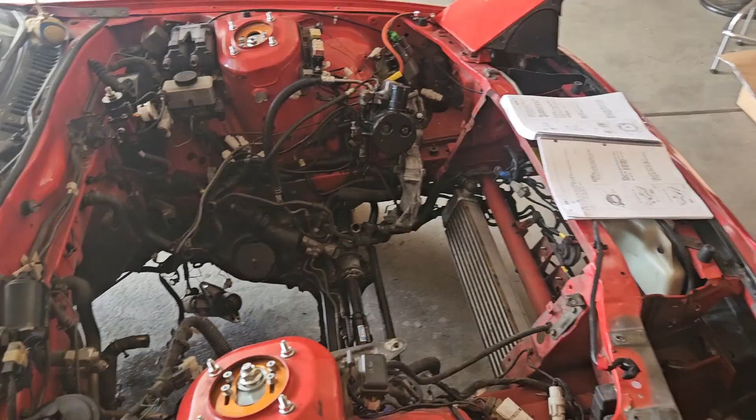Today is the day we start rebuilding the engine. So we got all the parts, we got everything ready. Everything's ready for it to go into the engine bay there. So yeah, I'm going to be building it today.

The first step is to get all the rotors ready to go. I already got them all cleaned, as you probably saw, but installing all the springs and the corner seals. And then we need to take the side seals, since they're too long, they come that way. We have to sand the ends of these down to get the right clearance between the corner seals and the side seals. So we'll be doing that, and then we'll get it all together.

So for the rotors, the first step is going to be getting the side seals all trimmed down, since they come longer than they should. So you kind of have to just sand the end of them down to make them have the right tolerance between the corner seals. But the first thing you want to do, so you can check that tolerance, is have the corner seals in. So we'll start off by just getting all the springs in and getting the corner seals in.

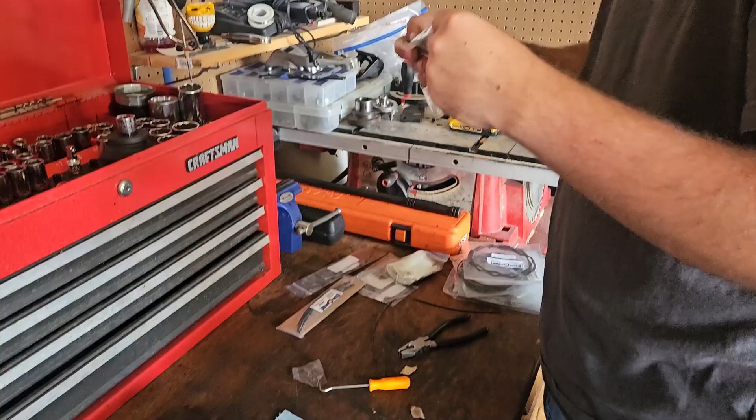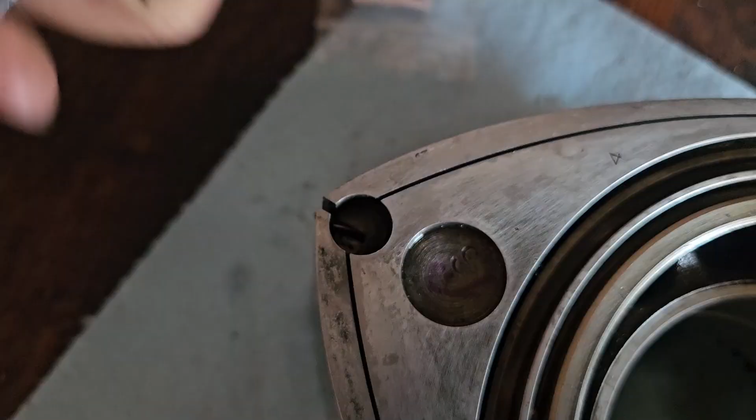They're very tiny. And make sure the gap on the spring is lined up with the gap for the apex seal, like that. Oh, this one went vertical through the hole. Let's see, how many times can I fail to put this in? There we go. Close enough.

And then you can take your corner seals here, which are individually packaged, which is pretty nice. Love Mazda. Get the corner seal out. These, like I mentioned, are the factory Mazda brand OEM ones. So should just be able to take these and slide them in there.

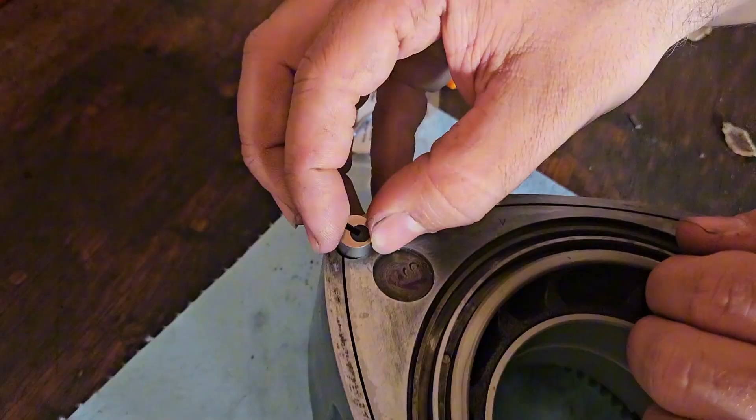You don't want to line up the apex seal hole at first. You want to put it to the side, because you're going to have to take it out, and you do that by coming up from underneath. But you just put these in to make sure that they line up and everything's good, and they should be kind of springy in there. And then you get the rest of them done.

Alright, so we got the corner seals in. You also just want to put these in to make sure they fit good and they don't bind on anything. With the springs, they should be springy. So these are all perfect in there. And this is the brand new side seal. You'll notice you push it up against this end. On this other end right here, it is too long to fit in. You can see that gap there. So that is what we want to get down. We want to shave that down.

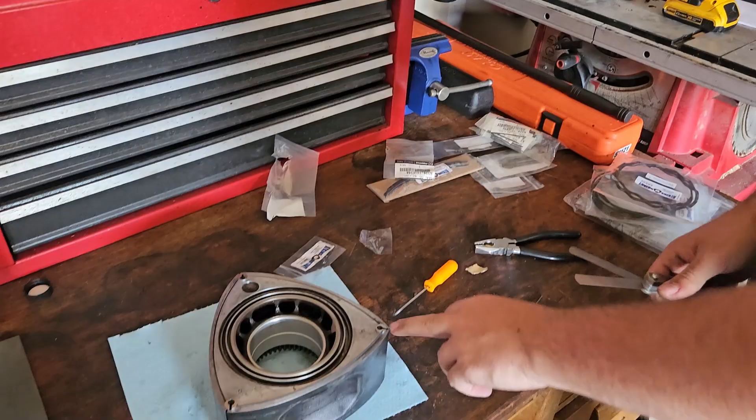The spec between the corner seal and the side seal is between 0.05 and 0.15 millimeters. So we got some feeler gauges here. It's pretty thin, but we'll measure that. And to grind that down, we have some sandpaper here. This is, I think, 220 grit, and then this is like 800. And I put some oil on that just to keep it lubed up.

But you want to go at a 45-degree angle and just keep doing this, and it'll sand it down. And you'll do this for a while, and then you'll check. And then the 800 grit sandpaper we have, that's just to kind of deburr it, make sure everything's smooth on the end. So we did that for a little bit.

And you can kind of tell that barely did anything. So you kind of have to do that a whole ton. But then after a while, you'll be able to put it in and it'll actually fit. And then you check the clearance and you should be good. Then you want to do that with all of them on every side of each rotor. So that's 12 side seals total you have to do that with. You only have to worry about one side of the seal. The other one you can just press up against the other corner seal, if that makes sense.

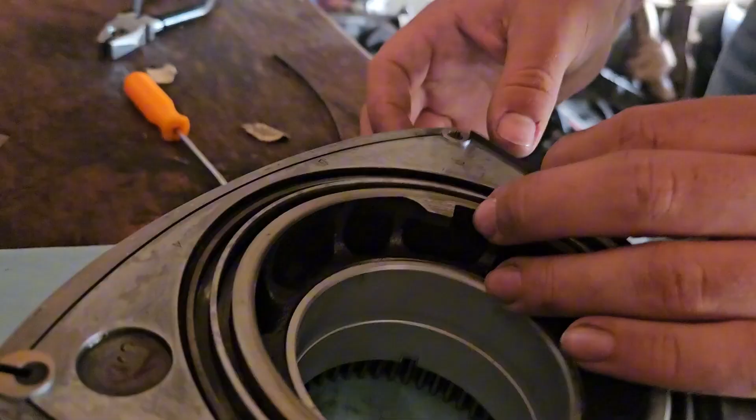Say hi to YouTube. What's up? Hi YouTube.

So, while we are working on getting this one down, you want to make sure you use the same ones. This one I'm measuring on this side, so it's going to stay on this side. And then my friend here is going to help me out. He's going to do this side.

One thing you want to keep in mind, I forgot to mention, one of these sides of the side seal already has an angle at it. And that is so it fits right against the corner seal there. The other side, it won't really focus, there we go, it is flat. So that's the side you want to grind down, the flat side.

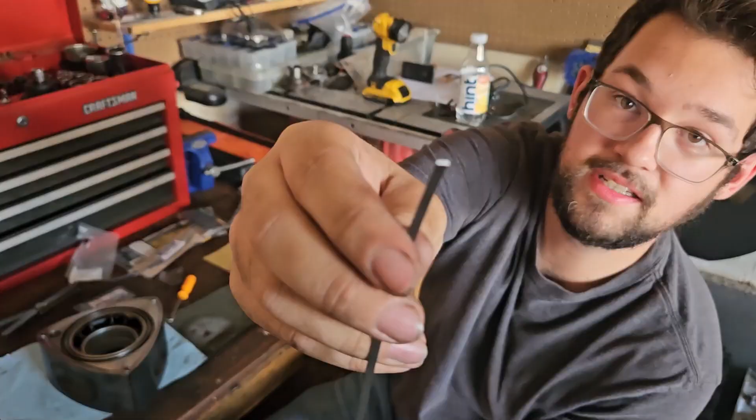Awesome. So we sanded this one down. You can see that is the edge we've been sanding. You want to match the angle of the other side pretty much. It's hard to see on camera. Not gonna focus. Yeah, that's okay. But you can see when we put it in here, it lines up. Oops, hard to do. Lines up real nice against the other one. Slides up and down pretty freely.

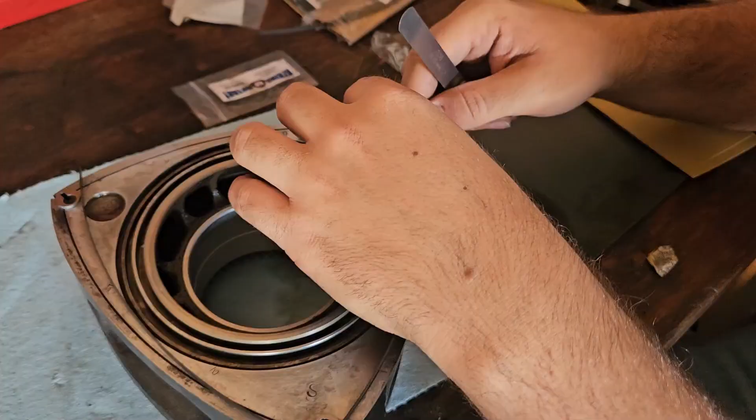And then we have our feeler gauges here, and this one slides back and forth with pretty minimal effort against the side there. And then this upper limit doesn't fit in, which is pretty much what you want.

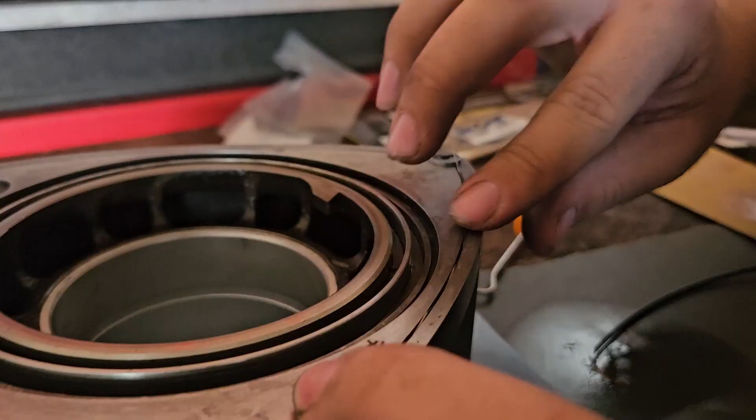So now that we have this one done, I'm going to take the spring here. You want the winged ends of it going up to get even pressure against the edges of it. And then you just slide them right in here. Just like that. And then you can put your seal in. Try to get it more centered. The spring, there we go.

So then with the seal in, see that's all in there. It's nice and springy, which is what you want. When we go to install everything, we're going to coat all this in Vaseline, just to hold it together while we install it. But in the meantime, we're going to go ahead and get all the other seals done for that. And then we're going to do the same for the other side.

So we got all of these side seals nice and clearanced correctly. You can see they're all pretty springy. So what we're going to do before we flip it over and work on the other side is we're going to work on the oil control rings. There is an inner one here and then an outer one there. Each of them has a spring and then a metal ring with an O-ring inside of it.

These are the O-rings here. These are the metal rings. These O-rings go inside these guys, which is a two-handed job. So I'm going to get these set up with the correct O-rings, and then I'll show you guys how to put the springs in. Alright, so I got the O-rings in here.

There's a bigger O-ring and a smaller O-ring. This is the outer control ring and the inner one. It goes inside this outer one, which is kind of weird. It's kind of difficult to do since it folds over on itself, but that'll be fine. Should be good in there. And then the small one's easier. It just goes along the outside, so you just stretch that over.

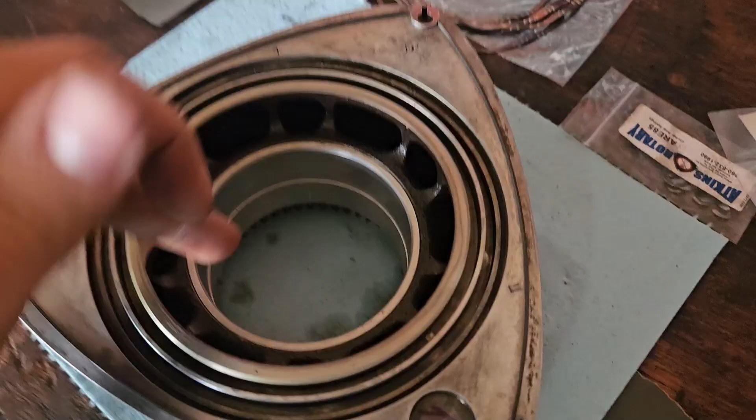And then this is where it gets a little confusing with these. I'm working on the rear rotor here, and you can see the interface for the gear. That is on the stationary gear, goes on the rear plate. There's a stationary gear on the front plate and one on the rear plate. So these rotors are pretty much facing in opposite directions. You can think of this gear ring being out.

I say that because the oil control ring springs depend on the direction it's rotating in. So it's divided into front side of the rotor springs and rear side of the rotor springs. The front side has these white marks on it, and the rear side has blue marks on it. You can see it all explained here in the list. That's the front. It says cream paint. That's white paint. Or blue paint for the rear face of the rotor.

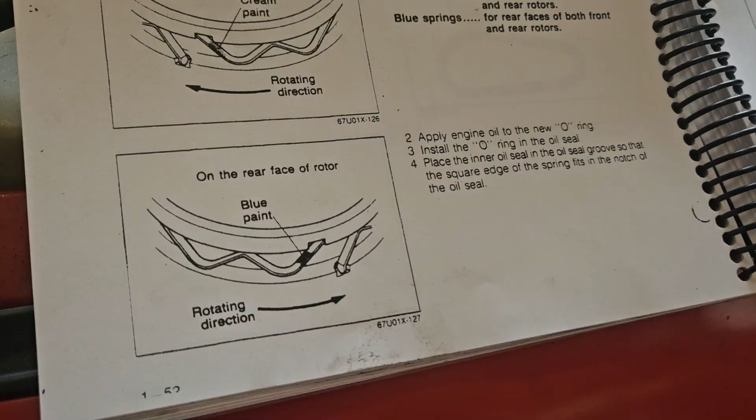You can see the rotating direction differences, and you can see it has a little hook that hooks into the rotor, and you can see the holes for those. Let's see if I can get them to focus. Like right there, there's two on each ring, and each ring's offset by like 90 degrees. But those are where the edges of these springs slide into.

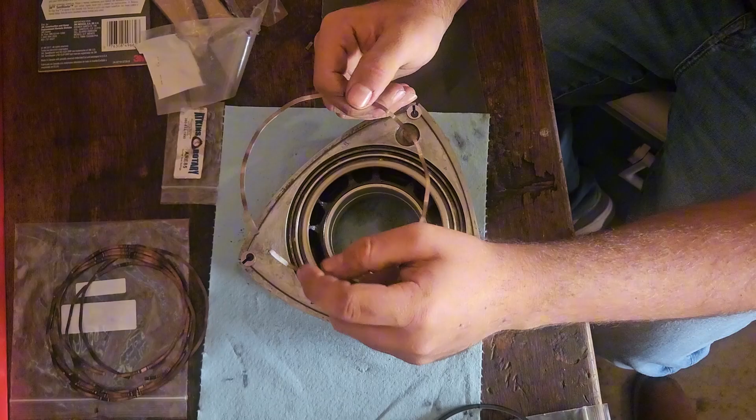So I have the white painted ring springs here for the front face of the rotor, like I was talking about. And what you want to do is you have the painted side up, pointing out, and then you can see in there are these little holes. You can see there's two on each of the outer ring and then two on the inner ring.

With that paint up, you take this little tab here with the curved end and you slide that right into that little divot there. It's kind of difficult, but don't worry if you get it wrong, because it'll spin around correctly. But you can see here the rotor is spinning this way, so it's dragging the oil rings back that way, and the pressure on the spring kind of locks in place there.

Then you do the same thing for the inner one. White paint out, take that end piece there and slide it right into the groove, and then I want to get it set in there. A little difficult, but it's hard to do, huh?

But now that that one's in the groove there, the inside ring is all set to go. Alright, once you got the springs in there, these are the control rings. Got the O-rings up in there. On the bottom side, you can see there's these little indents here, one on each side. That's how you can tell that's the bottom, that goes down. These little indents catch on the upper edge of those springs that we put in.

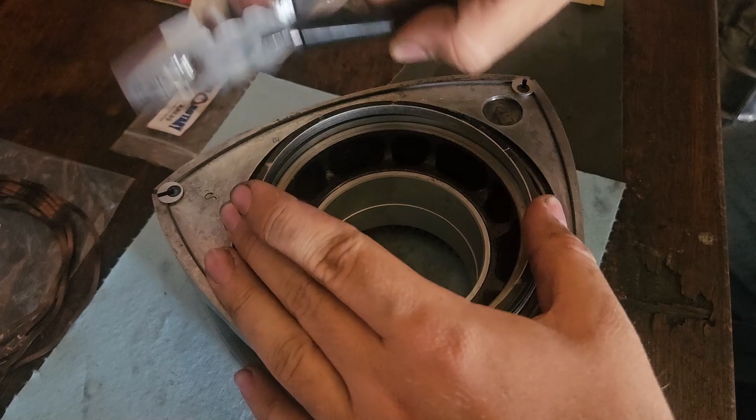You'll notice it's sitting a little above the edge. That's what you want. This is another sealing surface like these, but instead of sealing air, it's sealing oil. While it's in there, you can feel it, but it might be hard to see, it has some springiness to it. And that is what you want. So it sits a little above all around, and it springs.

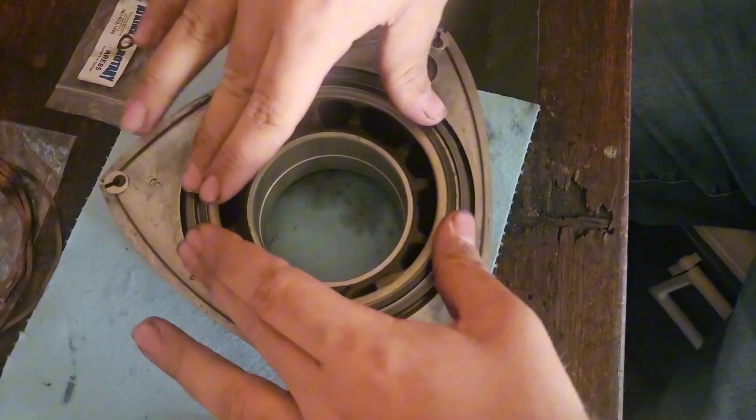And then you do the same thing with the outside ring. Get it lined up with that tab right there. Drop it in. Take the old ring, if you have one, and then just use that to help you get it seated.

Easier to find a mallet than this wrench. Is it working too? No, it's not over here. Yeah, they're using it on the brakes.

But just go around, tap it there. Broke the control ring. This is why a mallet's better. Yep. So I'm not too worried about it. Nothing lost, really. I guess that's why you want to use an old one instead of a pressing tool, instead of pressing damaged ones. But let's see.

You can stop doing that. Are you doing it? No, please, thank you. My car's out there. So, maybe easier.

Well, just tap it in like that. And that should be. Oh, I broke it again on the other side. Make sure you get the pieces out of there if that happens. But this should be good for that one. See, it springs just the same. Should be good. Might have to hammer this side down a little bit, but yeah, it's good, springy like that.

Right there. And then once you get that done, you do the same thing on the faces of all the other rotors. Of course, on the rear side of the rotors, you use the blue painted springs, but everything else is exactly the same. Perfect.

So with one side of this rotor done, since we're going to be flipping it over and moving the rotors around and later installing them, we want to make sure that all these pieces we just put in stay in place. So once we verify all the clearances and that the side seals and corner seals are all good, make sure you keep track of what goes where, right? So make sure you leave each one next to the hole you took it out of.

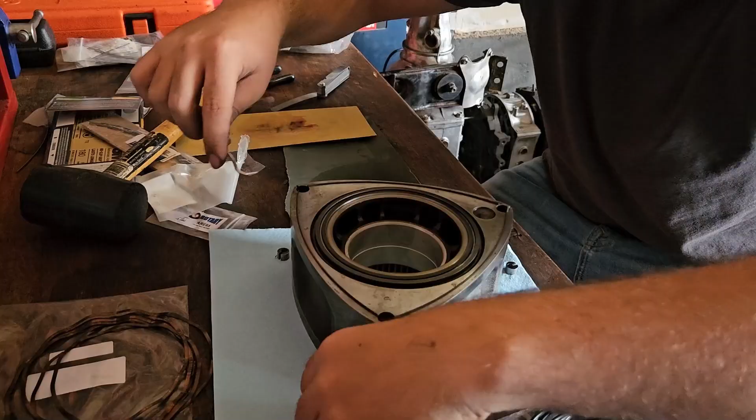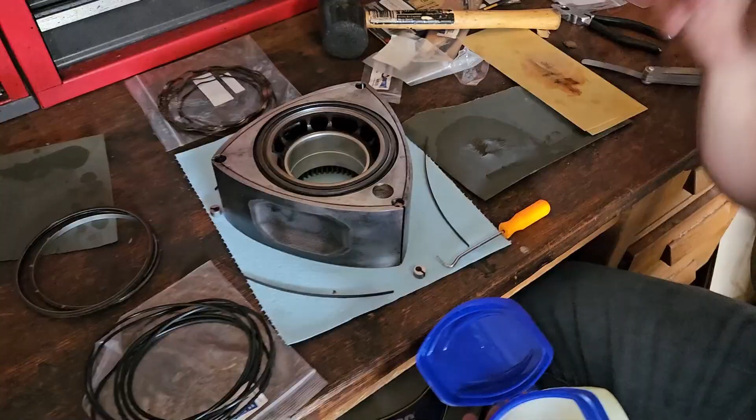And then same with the side seals here. Put them right on the side that you took them out of, or however you prefer to keep them organized. And then we are going to use Vaseline to make sure everything's all staying together. This stuff will burn off pretty much immediately after the car starts, and it keeps it all lubricated enough just for its first starting.

So you can take a big fingerful here and then pack everything up that's going to be touching a part, so we can get the holes here. Don't have to worry about how much you're putting on. Keep the spring in there though. Don't really worry about using too much, as long as it's not completely drowning in it, right? But then you can just smear some right along the edge of the outside here, just so when you put the side seals in, they stick to the Vaseline.

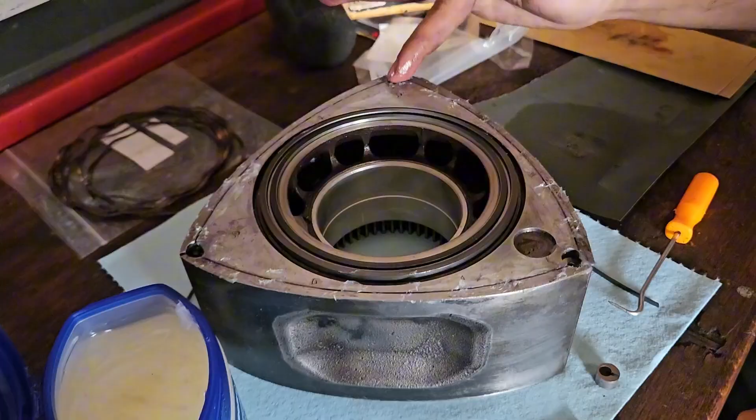Get the edges like that. Get the inside of the corner seal holes a bit. And just get it all around pretty much. Get some bigger globs just so it sticks better. Same thing here. And then you can go ahead and just reinstall your parts the same place you took them out of.

Once you're sure that everything fits, you can line up your corner seals with how they're supposed to go. You want to make sure those are lined up anyways before you put the rotors in, so the apex seals go in good. But just for the sake of showing it here, we'll have them lined up. Same with all the corner seals.

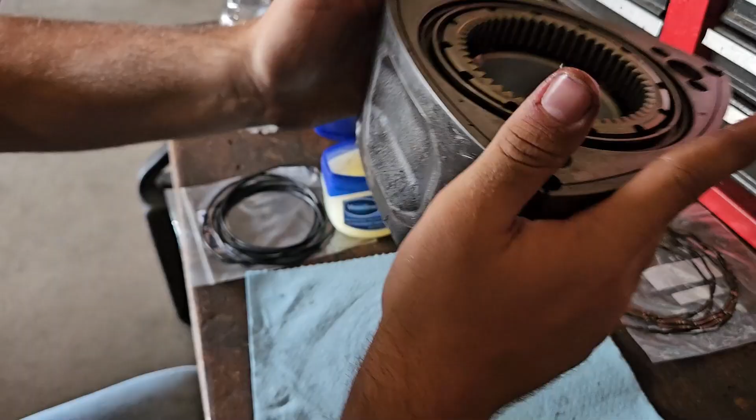Awesome. So all the pieces are in now. Everything's good. You can put just a little bit extra, like on the tops, just to keep them lubricated. When you flip this thing over, the extra Vaseline will help it just stick more, essentially. So once you have all that done, we are going to flip this over so none of the pieces fall out, and set it down, and then we'll work on the other side.

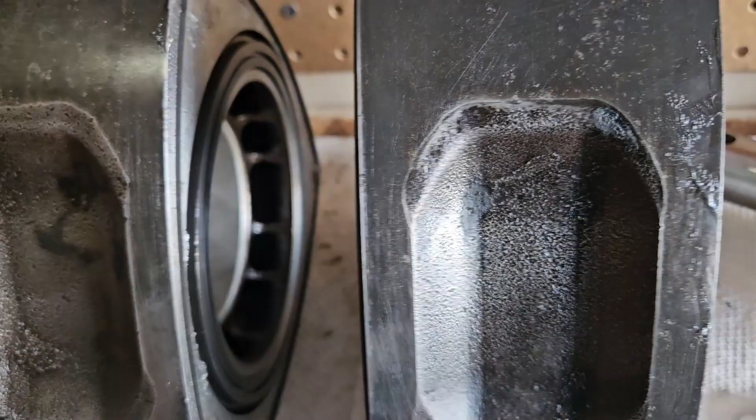Alright, we finished up getting all of the seals clearanced on both the rotors here, and got all the oil control rings in on both of those guys. See everything sticking out the amount it should from the side there. So, got all these done, got everything put back together, went ahead and cleaned up the garage some just so we have enough room to comfortably build the engine. So now we get to put it all together.

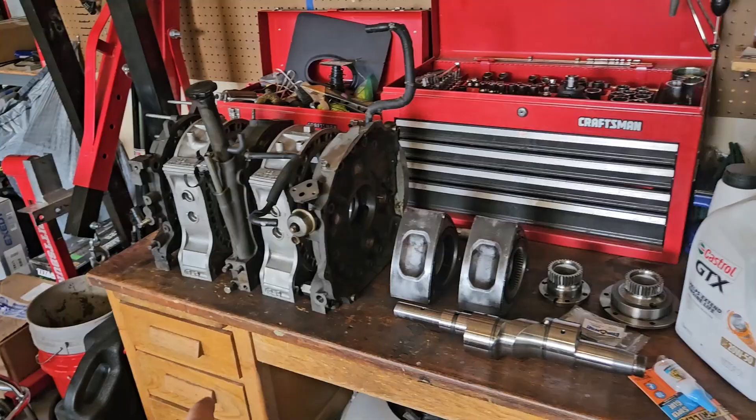Got everything laid out for the engine rebuild right here. All the fluids I'll need, all the parts, all the tools and different sealants and such. Before I get started though, I want to explain one thing that I will have to do just because of the state of my housings. So, if you take this one for example here, that chrome wear is on this lip right here. You can see there's a little spot there, a line here that's flaked off. Right there, it's flaked off, but it's all under 2 millimeters, so it is all within spec.

But you know what, this other housing is probably a better example. Yeah, this one has it a little bit more. You can see it's not too much. It's all within spec, but it is there. And it looks like this just came from the old apex seals. They have the corner pieces for better sealing. It looks like maybe those dug into the side there and kind of scraped it up a little, because it's only on this side where those corner pieces were. The other side is for the most part completely fine.

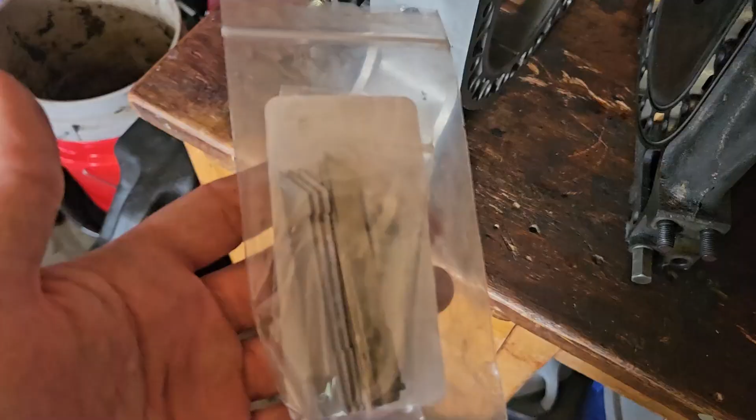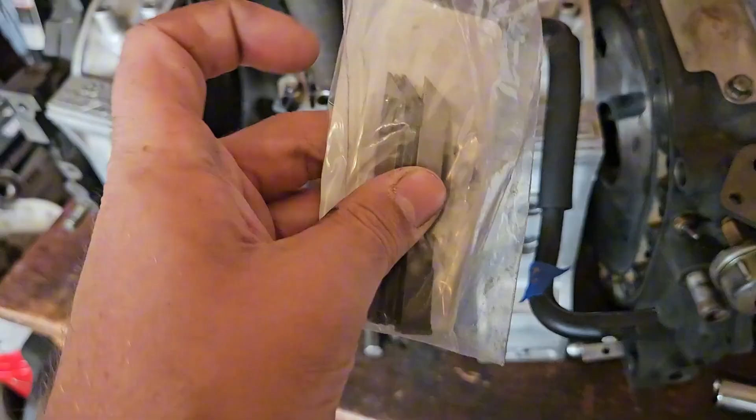So what I'm going to do is take these apex seals and put them with that corner piece on the other side. If you've seen people rebuild these engines before, what they usually do is this plate's the bottom, then they put this on there, then they put the rotor in, then the long side of the apex seal, and then they put the corner on top, which is where it would be riding here. But I want that on the bottom, which makes it difficult to build. So we have to take the corner pieces and super glue them to the long pieces so that we can insert them with that piece on the bottom.

That's also usually what people do when they're bridge porting, because they cut a much larger hole here, so they want that corner seal on the other side so it doesn't get messed up and fall in that hole. So when people do bridge port builds, you'll see them do the super glue stuff too. I just got some regular super glue. This stuff will burn off when the engine starts, so any regular super glue should work.

And what people usually do is they make it a little longer. You can see this is the regular length of the whole thing. But they'll take this and glue it, probably not that far down, but a little farther, so the seal's a little longer. Then when the entire engine is clamped together, it pushes that piece back down, and that just snaps the glue, just to make sure that glue's not in there.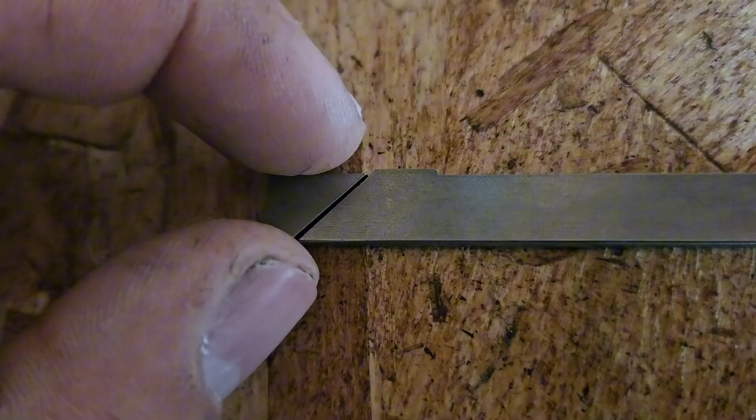But again, it should burn, but I'll probably give it like maybe that much, you know. And I'll just glue all 6 of these guys. And here are those guys there. I cleaned them up with a little brake cleaner first, just to make sure the mating surfaces that I'm gluing are nice and clean. This glue sets in like 10 seconds, so these are already pretty good to go. But I'll let these sit for a while, and then before I install anything, I want to make sure there's no excess glue on the outsides, so I'll clean those up a bit.

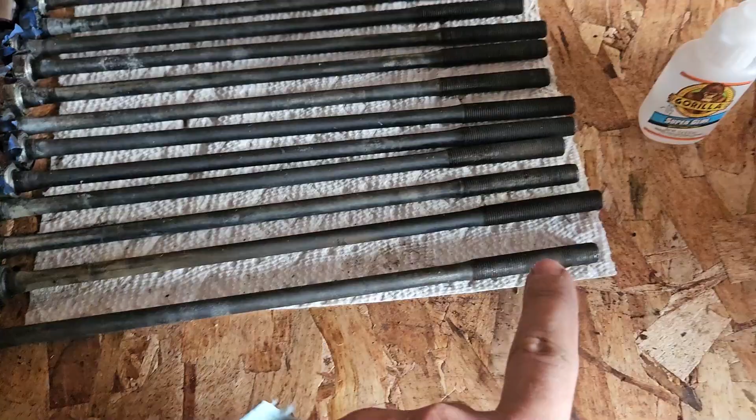And then I don't know if I mentioned it, but I also cleaned all these tension bolts. That's another thing you want nice and clean. They all had grime and stuff on them just from leaking oil and such. But I soaked the ends of these all in PB Blaster and hit them with a wire brush. So now there's not really any debris in any of them, so that'll be nice. And I did the same on the front housing. I cleaned out all the holes that these guys screw into.

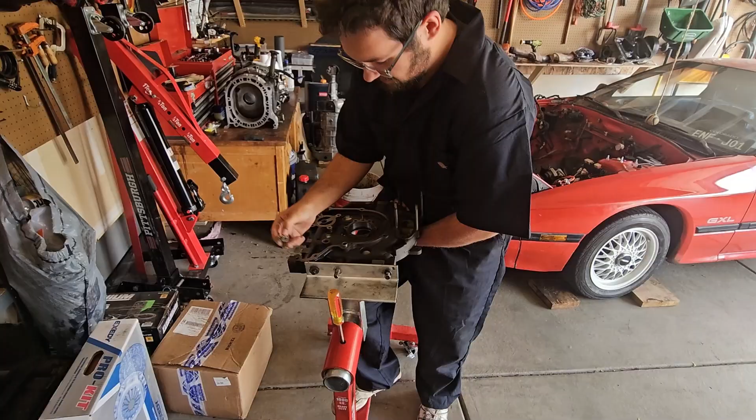So right now, we're just mounting the front plate up to our engine stand guy here. And this will let us actually stack up the housings. And we'll be able to spin this around, and this is what you want to build it on.

Alright, so, should just be able to take the front stationary gear here. Can only really go in one way. Just get it lined up. Should drop right in like that. Should just slide in easy. If you have to hit it like we were doing earlier, then that's probably not good.

And then we're just going to hold this temporarily. We're just going to put 2 bolts in. We're going to take these bolts out once we get everything together, because we're going to flip this entire thing over once everything's together. And then there's some bits that go in here, and there's a cover plate here and some bearings, but that'll be for the very end. Alright, so once we have our stationary gear in, the next step, we're going to flip this guy over, and it will stay flipped over for the majority of the time.

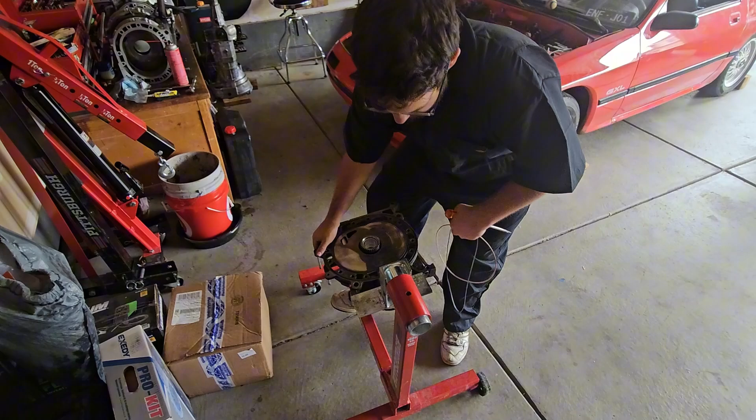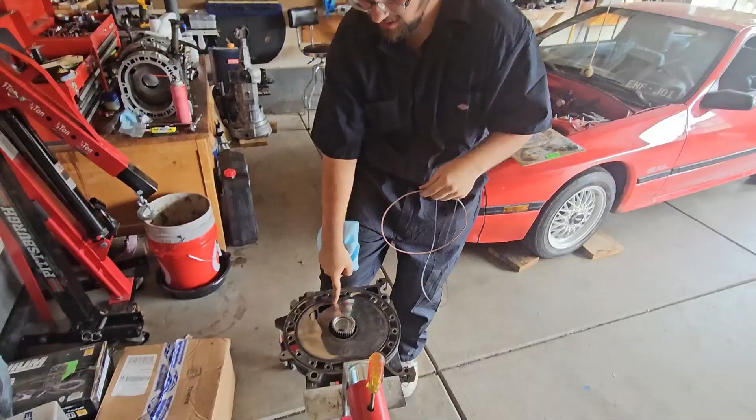And we are going to install the coolant seals. And the coolant seals go in these grooves around the very edge here. There's 2 of them there, and there's a bigger and a smaller one. The smaller one is right next to the combustion chamber, so it's a lot beefier. And one important thing to note about these is the inside one, there's a part there where it's conjoined. There's a seam, you can see, and it has these markings next to it. And that actually goes a specific way.

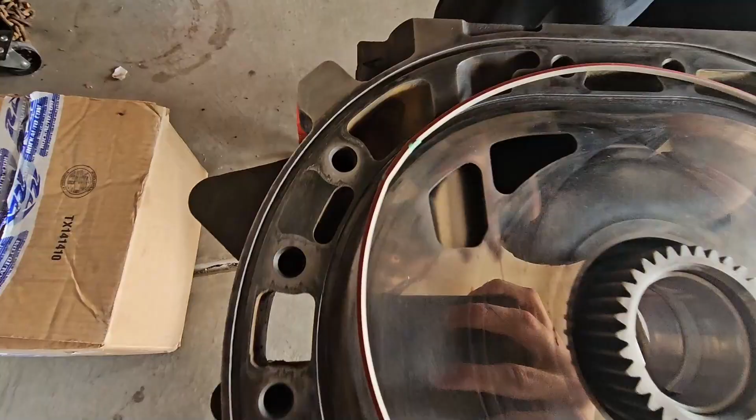You want to put these on the coldest part of the engine, since that's the weakest part. And that is right up here, just about right above the intake ports. So you want to put it there. And you want to make sure when you're installing them you have the white paint, the white edges facing outside. So, like that.

And what you want to do, it helps it stay in there while you're installing it, but it also improves sealing, as you can use some Hylomar. This is a gasket type of compound, but it stays soft and tacky. It doesn't harden like many others. And then you just want to kind of put a thin bead along the outside edge of it. I don't think you need a crazy amount here. And then you can wipe off any excess that you don't want. Like the excess that's all right there. And then just do that around both of them.

This will improve sealing, and it'll also hold the seals in there, so while you're rebuilding it, they don't fall out. And then if they fall out and you put it all together, then you're going to have a coolant seal leak, and you're just going to have to rebuild the engine again anyways. Which, all fun, I don't really want to do. I'd rather be able to drive the car.

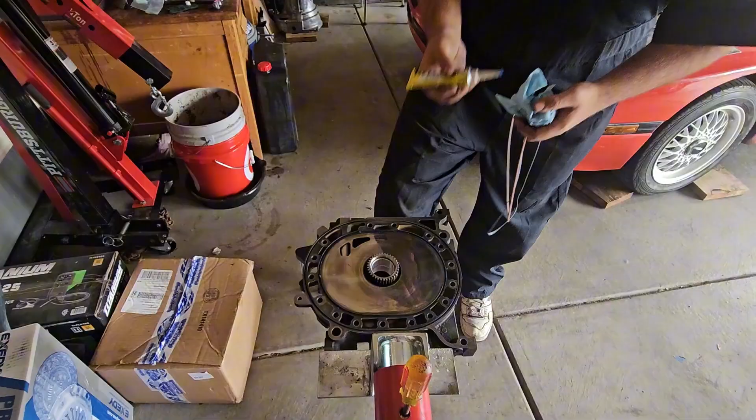So next up, we are going to get this housing ready to install onto there. It just goes on, see, just like this. Everything lines up with those. But before we put it on there, the first thing we want to do is, there are 4 dowels total that go into the engine. Got all 4 of those guys right here. They keep it all straight when you're installing everything, but also 2 of them are oil passages.

The dowels that go up here through the top. The other housing is the same. The dowel goes through here, and that's actually an oil passage. So there's O-rings that you put. There's one of these on each side. And kind of just the same thing as the coolant seals. We're going to put a little bit of this Hylomar stuff on there just to hold it in place while we do the install, since we'll be flipping it upside down and all that. The Hylomar stuff's also very sticky, and it doesn't really come off that easy. So, get gloved up.

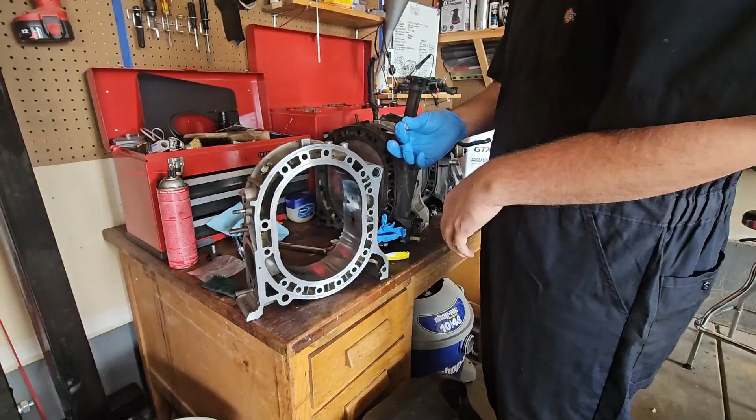Shouldn't take too much. Just a little bit on there to hold it in, and then there's one on the other side. So once you have these O-rings in place on here with the Hylomar stuff, I put way too much of this. This is just RTV gray.

You want to put some of this sealant down here on the legs. Underneath all this is the oil pan and all that. So you kind of just want to make sure that this is all sealed up, just to help prevent any oil leaks. It's going to leak oil because it is a rotary engine, but might as well at least try to make it not, right?

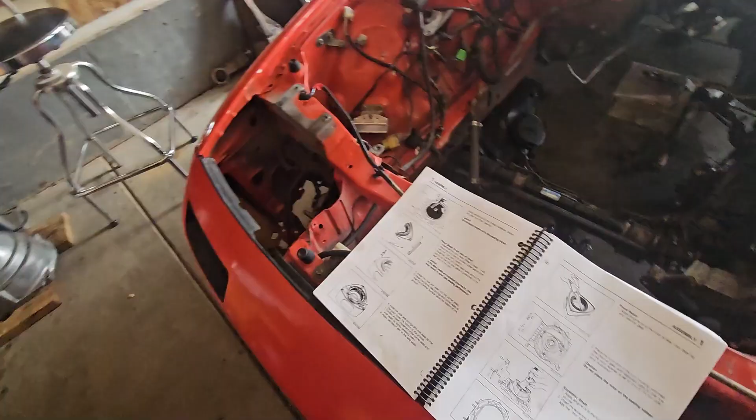But you can see in the manual there, on the bottom of the right page, it has all the locations, kind of just a diagram of where to put the sealant stuff. So that's kind of what you want to follow for that. And then, once you have all that set up, now you can actually put this guy on there. Make sure your O-rings and everything are still in place.

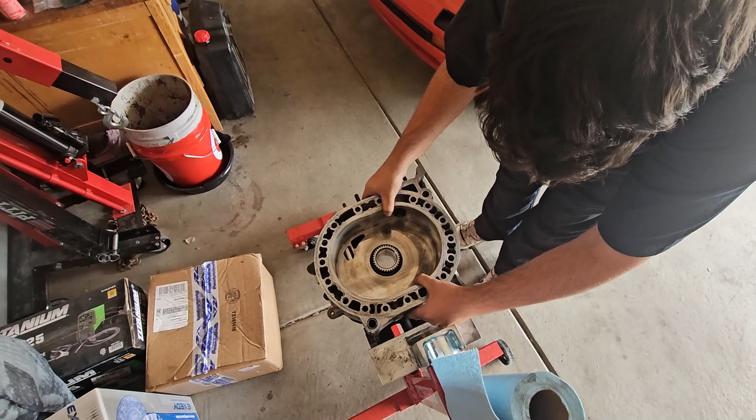And I did the sealant on the side that's going down here first. And then for this one, it's pretty easy. You just get it lined up and you just set it on there. There are dowels that go through that we'll be putting down. Those dowels I was mentioning just a second ago. One goes right through there and one goes right through there.

So we can grab these dowels here. So before we put these in, I've seen a lot of people just coat them in a little bit of oil. This one at least is an oil passage, but it also just helps everything go in smoothly. So I will just have to use my hands here. It's not really an ideal way to do it.

It's not fun. Just kind of lube it up, you know. Lube up the little shaft.

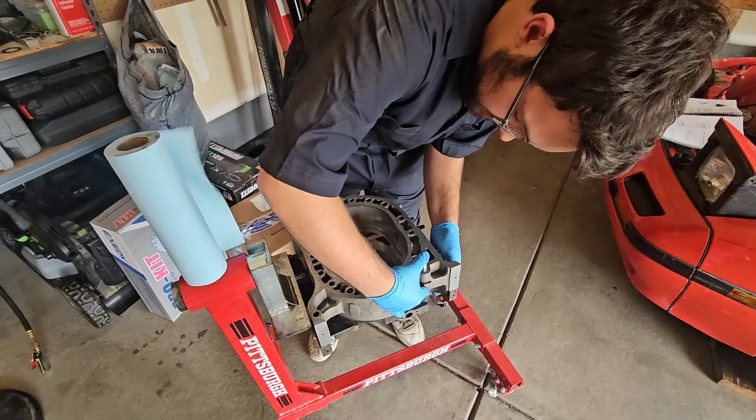It's not funny. And then it should go right through, and should sit a little lower than that, so you might have to, there we go, just kind of shift the housing a little bit so that it's all lined up. Get this one all greased up too. And it should just go in pretty easy. Not too much resistance here. Yep, should go in just like that.

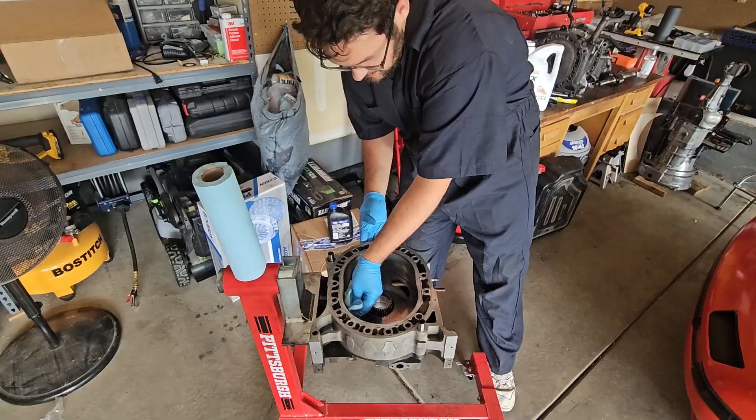And with the new housing on, you of course want to make sure everything is all cleaned off, no dust in there. I've wiped these things down about 100 times now, but just give it a good once over. Make sure there's no debris or anything in there. And then for these, I used engine oil. For everything that's going to be coated in engine oil, I'll use actual engine oil just to pre-lube it for assembly for its first time running.

But for everything inside the housings, I'm just going to use 2-stroke engine oil since I pre-mix my car. I have a video coming out on that soon. But this burns better, so I'm going to put that in the actual housing itself. And I don't really have a high-tech way of doing this, so it's just going to be by hand. Ooh, it's a lot. It's going to take that stuff

and just coat the whole inside here, because we do not want it to be dry when we're cranking everything over for the first time, because that is a good way to make a lot of heat and make a lot of parts break. So get that all lubed up, everything thoroughly coated on the inside, and then I'll just wipe off some of the excess from where the coolant seals go, so we don't have any complications there. Get some off here, but that should be pretty good.

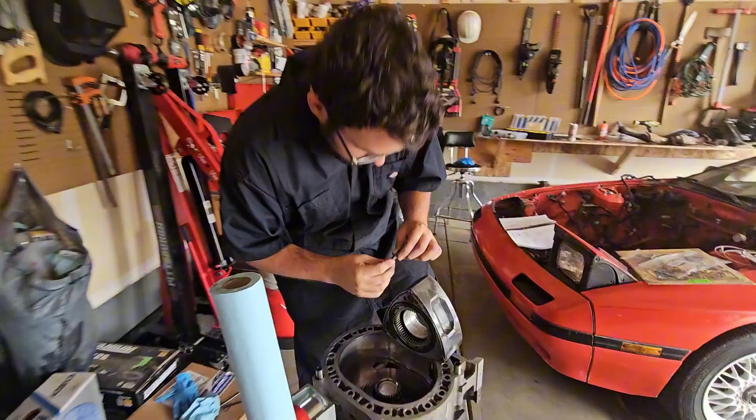What you want to do is just take your apex seal and line it up right there. You can see that that corner seal could be twisted so that the apex seal doesn't go all the way in. And then just on both sides, you want to turn it so it lines up and then insert the apex seal. Make sure you don't pop one of them out. Just make sure they're all lined up, and you want to do that for all 3

sides. All right. And then you just want to insert it gear side down; that gear on the rotor meshes with this gear right there on the inside. It's a little stressful, but you should just be able to gently lower that into there, making sure not to mess anything up really. It'll probably sit a little higher than the edge here just because there's springs on the bottom pushing it up. But that is the rotor inside there.

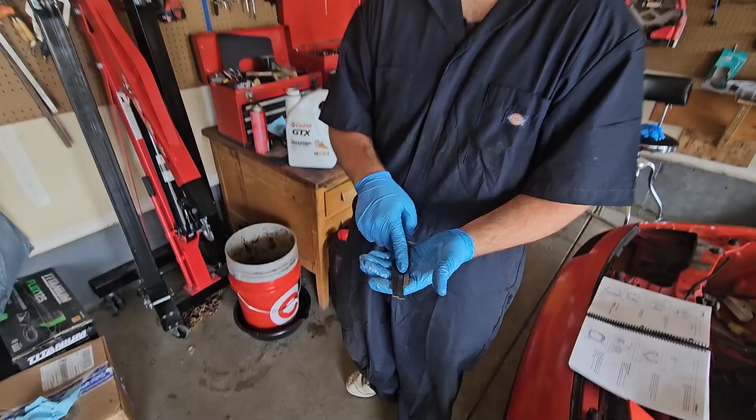And then next up is the apex seals and the apex seal springs. Like I was showing earlier, I got these all glued together, and then we have these springs for those. Take my gloves off real quick to make it easier, but then we'll go ahead and insert those.

So now that the rotor is inside the housing there, it's time to get this big old shaft here down up in there. It should be clean. Just wipe it off, make sure there's no grime or anything. Same thing with the rotor bearings here. The bottom one should be clean as well. And then I'm just going to take some engine oil here, get in there with my fingers, and we are going to take this guy and just grease up what's going to be touching things in here.

So this one goes to that front bearing, the front stationary gear bearing that we put in the first step, this piece here. And then this bigger lobe here is what the rotor rides on. You can see they're offset because the rotors are offset, so it's kind of hard to get the alignment on these things wrong. It's nice that this oil is nice and thick, so it's not running all over the place. But with that in there, now we have this pretty stressful part.

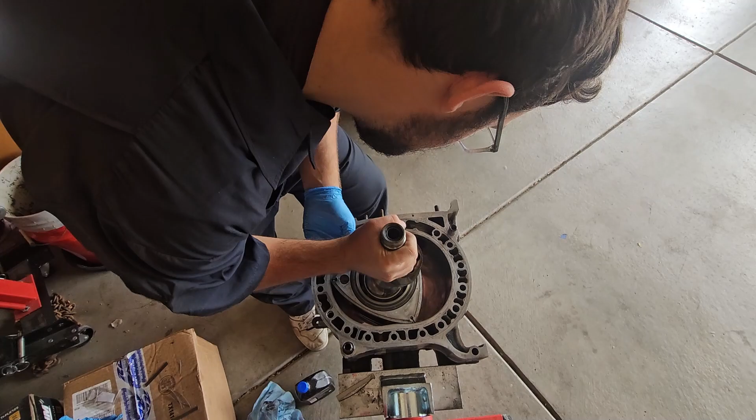We want to take this end down, and we want to insert it through the front bearing and the rotor bearing. You want to be gentle, don't force anything, and you want to get it as straight as possible so you don't scratch anything. But that should be good there. And now pretty much everything is locked into place.

So you can see this is just turning this by hand. The rotor is rotating around the eccentric shaft here, and it is connected with those gear teeth on the bottom, so everything stays pretty much perfectly aligned. And now with all this secured in place, we can put the apex seals in. So like I was saying earlier, the reason for me gluing them is because I want this corner piece facing down, which is difficult to do if there's two separate pieces, since that's inside there.

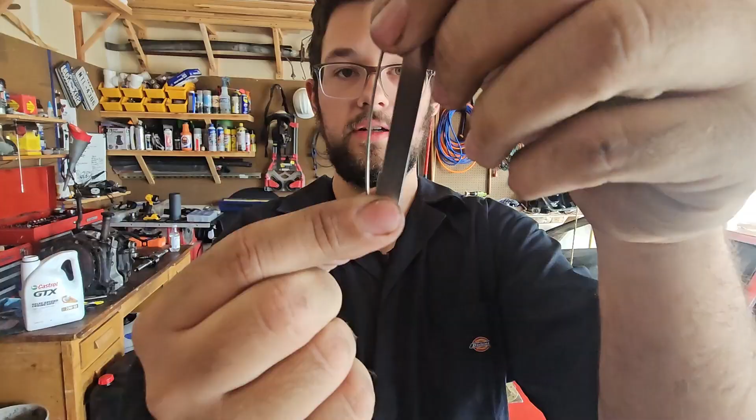But for the springs here, you can see this long one goes on the edge here, between these two grooves, top and the bottom, and then the inside one goes between the two. It's hard to get lined up since they're just real tiny pieces. But that goes right there. Interestingly enough, it's a little shorter than these two grooves, but that's just how they are. I don't know why.

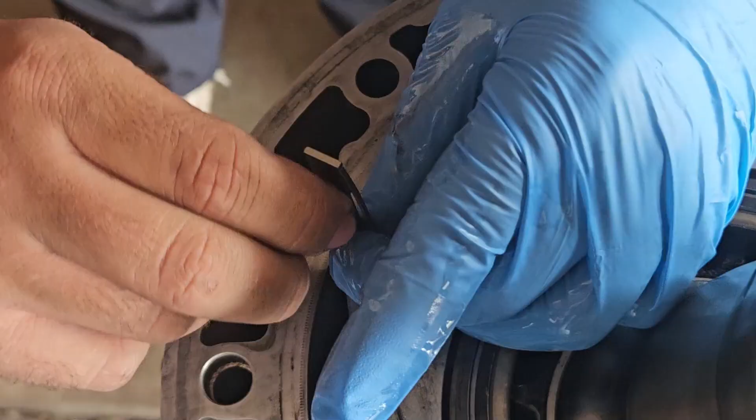So now we got the apex seals, again going corner piece down because of the chrome flaking. Get the long one between the two grooves on the side there like I was talking about. And then we are just going to take that, line it up right here, and should just be able to push it down in there. Now it's got started there, and now we want to get the inner spring and push it up against that bottom ledge there, which may be a little difficult just because it's all very tiny.

Let's see here. Yeah, I believe that's in. We can take just a little screwdriver and just push down on it to make sure it's bottomed out there. Yep, should be good. I believe so. Let's pull it up a little bit just to make sure. Yep, that's all lined up right.

And then you can push that apex seal all the way down in there. Shouldn't be too much resistance. If you have to force it that last bit, one of your corner seals probably got turned a little bit. And to straighten that out, you will unfortunately probably want to take the rotor out again, just to make sure that's straight.

Yeah, should be good. Nice. Okay.

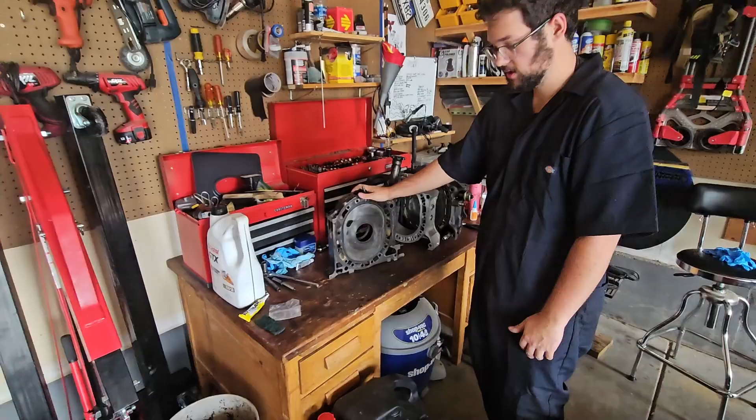So with the rotor and the bottom housing and everything there all set and good to go, the next step in the stacking process is going to be the center plate. Of course, we'll get this all cleaned off. The surface itself is a little dirty on the outside, but that shouldn't matter. But then it's going to be the same step as we did for the front housing. Hylomar on these, seals, same spot with that seam there, inside and outside. And then also, same exact thing on the other side.

Alright. So we got these seals on here. Got them all Hylomar'd up just like the last ones. And then this plate, flip it over and it goes right in here. The annoying part about doing this, especially since there's only two of us here, is that somebody has to lift up on this shaft to get that plate kind of at an angle and down. So we're not going to be able to record it, but if you want to just picture it, close your eyes. One of us is going to lower this plate on here, the other's going to pull this up, kind of angle it, and then push it down on there.

Real quick, one more thing before I put that on. You also want to just use that same oil we used before, and just get the top side of this rotor and just this face as well, just so that's all lubed up and ready to go. And I think what we might do is turn this whole assembly to the side. We'll see if that works.

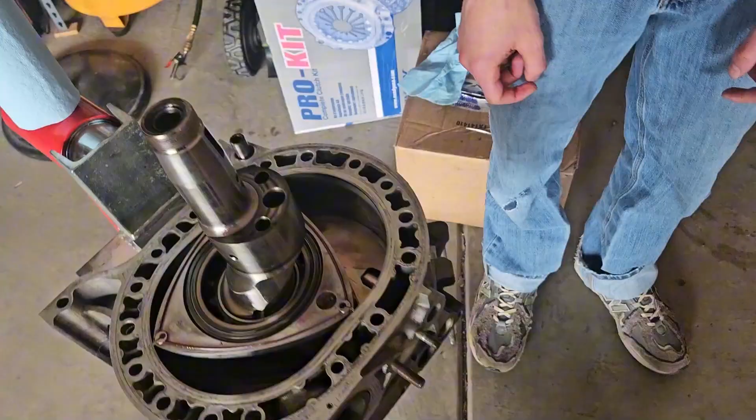No, that's fine. So I forgot, we had that on, we lifted this thing up, we got it all on, the seals are all good. Then I realized we forgot to put the sealant on the post here. So we'll do that, and we'll do the same thing. Alright, so we got this plate on now with the sealant in there, you can see. Hopefully all our seals are fine. Looks like this whole thing kind of sits up a bit, probably just because of the springs on the rotor and all that. It should be fine though. I guess it'll just be like that until we get it all torqued down.

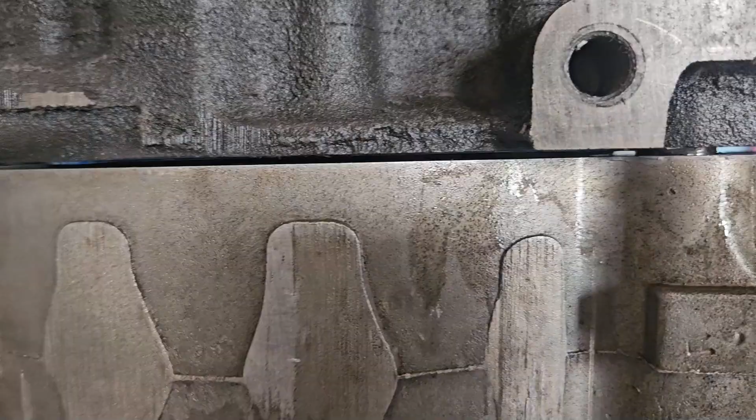But yeah, so now we're gonna get the Hylomar and the seals already on this side, and then just do the same thing we did for the front plate. Okay, so with the coolant seals and everything all set up on there, we're just going to prep this housing the same exact way that we did the last one. I'm going to put the sealant on the side that's going down on there, and then the Hylomar with the O-rings for the dowel. So we got the O-rings on both sides, got the sealant on the down-facing side here. So then it's just nice and easy. Give it a last look over just in case I'm missing anything.

Because it just took a little bit of force. Those are those dowels. Okay, so with this guy on here, we're going to do the same step pretty much as last time. We are going to get that sealant on the legs here. Then we are going to take the 2-stroke engine oil, get the whole inside lubed and the bottom surface. Then we're going to take the engine oil, lube up the shaft here, the top part and the bottom part, and then we should be able to drop the rotor.

Awesome, so we got everything all greased up. We got the sealant on there, got all the O-rings, all the dowels. So now it's time for the rotor. Pretty much opposite for the last rotor. The last one we put with the gear side facing down onto the front stationary gear. But this one we're going to do gear side facing up because the rear stationary gear is on the rear.

Same as the last one, make sure your apex seals and apex seal springs, corner seals and corner seal springs are all in line, so the apex seals will go in. And then you just take this guy and you drop it in. Because of the way the E-shaft is, there's really only one way that it'll fit inside here. So you just want to essentially just rotate it until it fits.

Should be that direction there. And just real gently. You don't want to damage the bearings. Slide it in until it's seated in there.

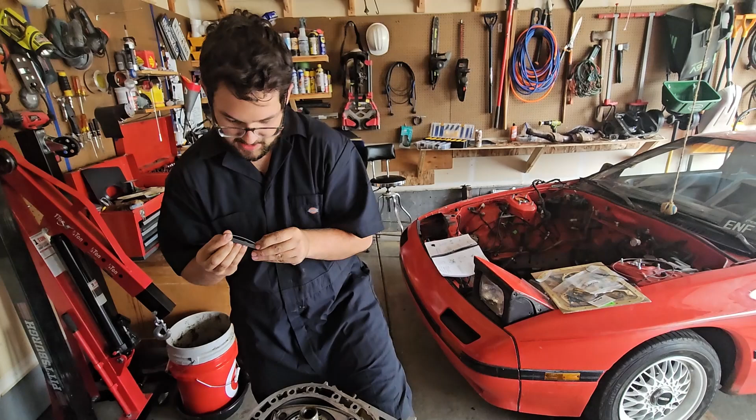Same thing with the apex seals on this side. Same exact process, just get the springs lined up, insert them in, and then push them down. The glue that I used for these, the last ones I was trying to do, snapped when it was going in. So pay attention to that, because if that happens, you want to take it out and re-glue everything.

So one of the corner seals on the rotors was misaligned, so we had to take it back out. And when we took the apex seal out, the glue broke off. So we re-glued that. We're waiting for it to cure for the second or third time now, right? So while we do that, we're going to get the rear iron prepped, ready to go.

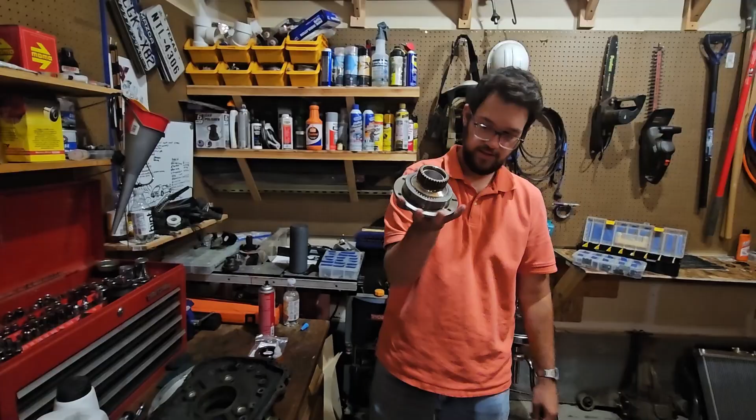This is the rear stationary gear. Same as the front, we got a new bearing in there. It has an O-ring that goes around the edge here. The old O-ring, I believe, was leaking profusely. When I took it out, it was just hardened and not very sealing-y. So we got that there.

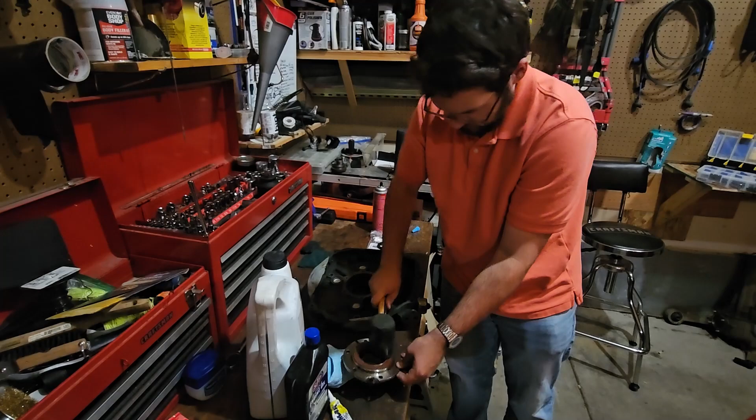And then on the back of this, you have the rear main seal. That's this guy right here. This side goes down, and this back looks like that. And that pretty much just goes on there like that. It can take a bit of effort to get it pushed in, but I think we should just be able to take a rubber mallet. Just kind of tap the edges of it. Just nice and gently, you know.

It's late. Alright. We should be able to be quiet now.

But that is that rear main seal in. I left some mallet residue on there, but that should be all good to go. Then this guy, same as the front stationary bearing, pretty much. Just goes right in here. Can only go one way because of the notch that's in there. This one is a tighter fit than the other one, if I recall correctly.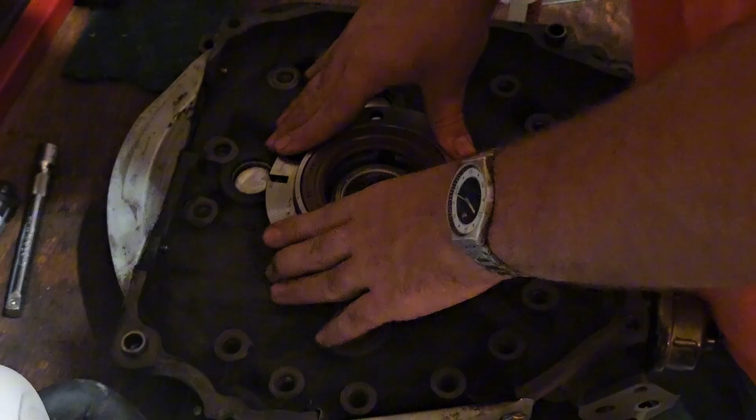So that's in there, just needs to be sunk down a bit. I'm not using the mallet because I don't want to wake everybody up again. There we go. So that goes down there like that, and then there's that O-ring on the inside which seals it. And then we have the bolts for that right over here.

And the rear stationary gear assembly here has 6 bolts, each tightened to 17 foot-pounds, which is not too much, so you don't want to overdo it. Set that to 17 foot-pounds and get all these in there. All right, so we got the rear stationary gear on here. We got all of the coolant seals Hylomarred and put in there.

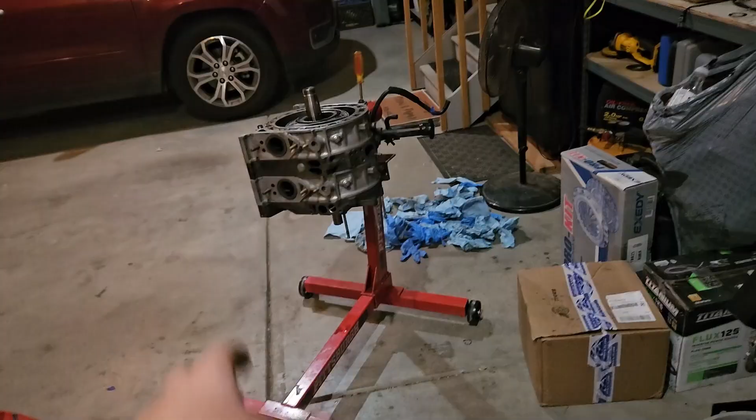All of the oil I put in here was a while ago. I had to take a quick break, so I'm going to re-oil it. It's still oily, but the rotor's kind of dry, so I'll put some oil on the face of this. I'll put a bunch of oil on this shaft here, some oil on the face of this and in the bearing there, and then should just be able to put it on there. I already got the sealant and everything on that housing as well.

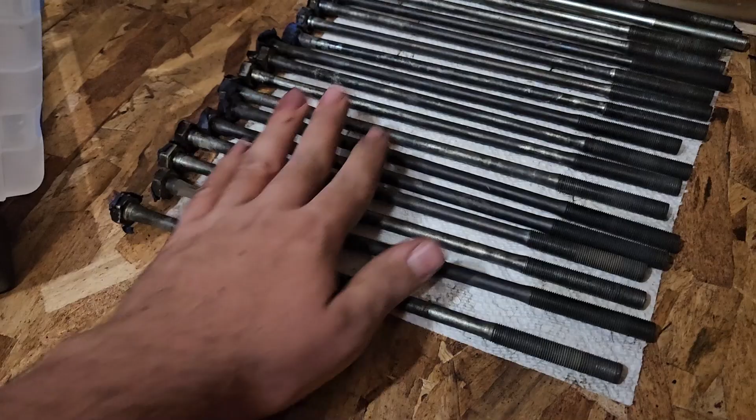All right, so this is on there, and that's pretty much the whole engine stacked. Pretty neat. Now it's time to torque it all down so it is all stuck together. Looking at our instructions right here, it says that is going to be 23 to 29 foot-pounds. And we want to make sure that we tighten them in this order right here. I have all of the bolts labeled from when I took them out, so I'm going to put them back in the same order, and then we'll get them all tightened up.

Oh, also almost forgot, that seal kit came with a bunch of these new washers for the tension bolts, but they have pretty much an O-ring on each one of them. So put one of these on each of the bolts that you're putting on.

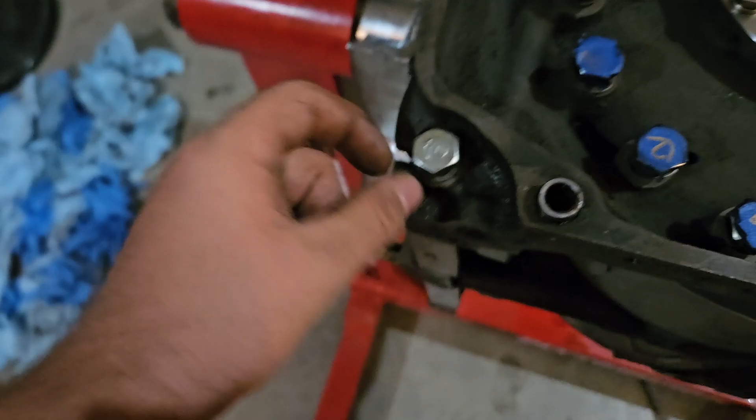Alright, we have all the bolts set in place here. One thing to note is that this bolt is longer than the rest, and this cavity here is longer. And it says specifically on here that the 17 bolt in the bottom left corner is marked, which is this one, essentially. So it's very interesting because I'm pretty sure this came out of that hole.

So who knows what that's all about. Maybe I mismarked it when I took it out. I'm going to go back and watch the video. But that's interesting, because I don't think it would have tightened all the way down, and I don't think this one would have been really tightened in at all. Who knows? We'll see, I guess. But we're going to get all these torqued down to, what was it? 23 to 29 foot-pounds.

All right, so everything is torqued up. Went through and torqued everything down to 25 foot-pounds. Then went through and torqued it back down again, just to double check and make sure. But everything is good to go, looks like. It is all assembled. Everything's put together. You want to make sure it rotates smoothly. If it binds up anywhere, that's obviously not good.

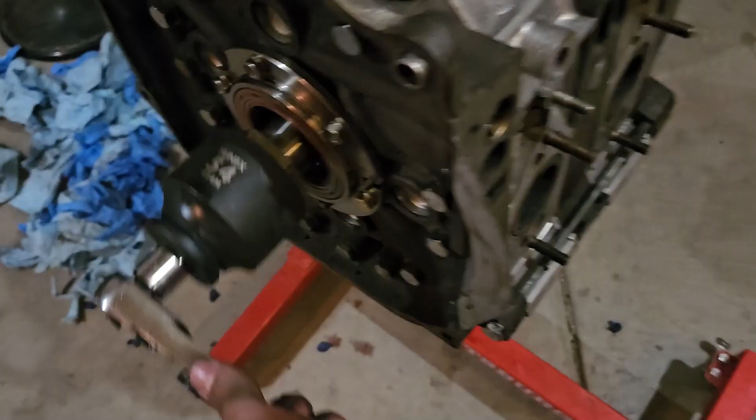So I threaded the main flywheel nut on there. Get this thing on there, and then it's pretty easy to move, not too bad, about as difficult as it was before, but you can hear it. It's got some compression in there. It's not a reliable way to test compression because there's no spark plugs, so the air is just coming out the back.

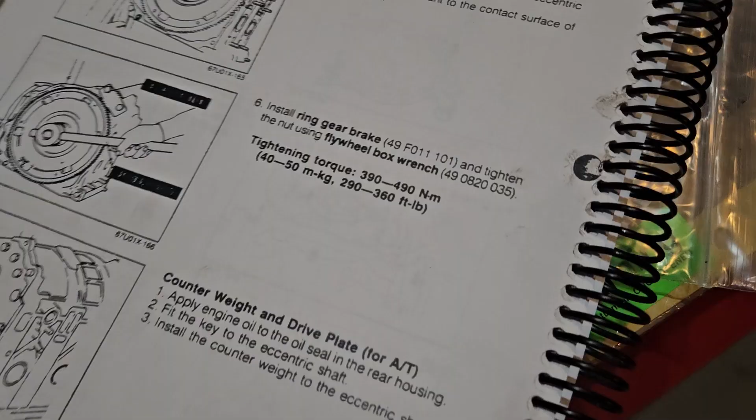But you can see some of that two-stroke oil's leaking out here, and you can hear the compression, at least somewhat. Just clean that up, making a mess. So yeah, I'd say that's good. Next step is to get the flywheel on, get this nut back off so I can torque the flywheel down to 390 Newton meters. I think I'll have to do like 250 and then 90 degrees or something. I know there's a spec for that floating out there. First I need to get this off though.

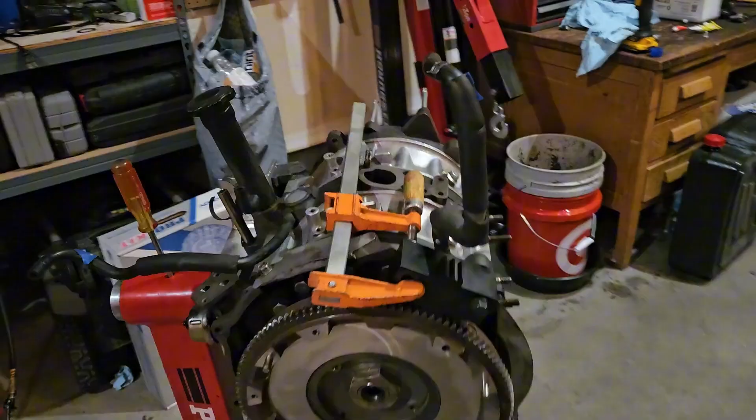So then you get the flywheel on, get the front all situated, and then you should be good to go. You want to pre-oil this seal here, since the flywheel is rotating around this seal, and then you want to get this E-shaft key back in, because there's a key on the flywheel for that. Alright, so I got our flywheel stopper installed right here. This bolt receptacle snapped off because I was an idiot, so it's just clamped down here, but this should mesh up pretty good.

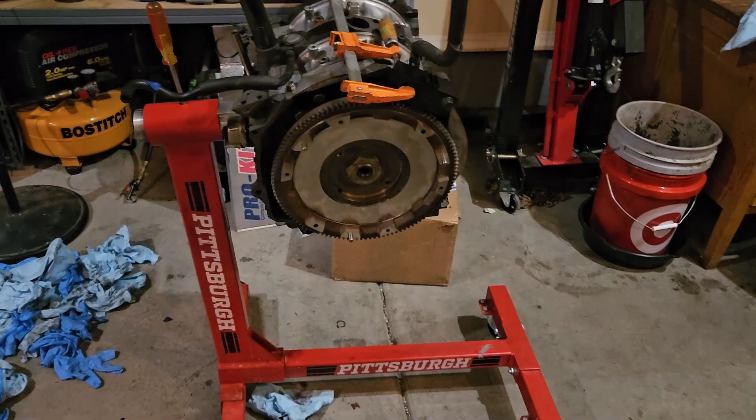So what they say is it needs to be 290 to 360. So I'm going to hit it to 250, and then give it like 10-15 degrees. The user manual says to use thread locker and RTV on the back of it. I've heard conflicting things online. A lot of people say not to use it, a lot of people say they do it. Overall, I don't think it really matters, so I just did a real small amount of both. Should be fine.

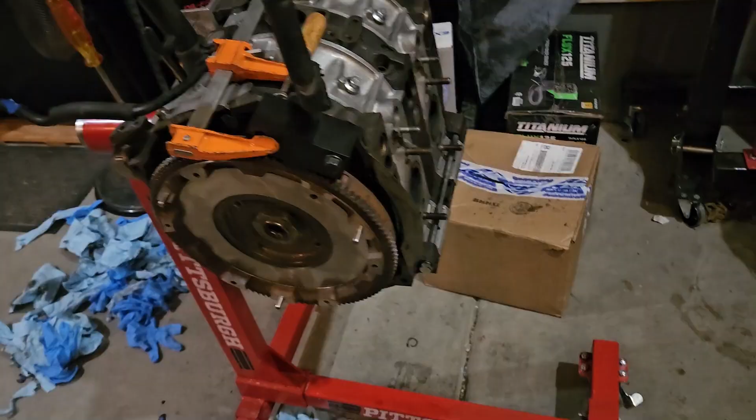Alright, so got this guy on, all sealed up like it should be. My torque wrench actually only went to 150. I looked it up. Guy said 150 and then 60 degrees. So I got it to 150, and it was about here to down there, so I probably got 40 degrees maybe. But technically I think it should be fine. The bar I was using is 2 feet long. I weigh 210 pounds, and I put my entire weight on the end.

I took one physics class in college so far. Technically it should be 420, which doesn't seem right. The entire stand here is flexing a little, so who's to say how much of that is going straight into that bolt? But I put my entire weight on it and bounced a bit, so I think it should be fine.

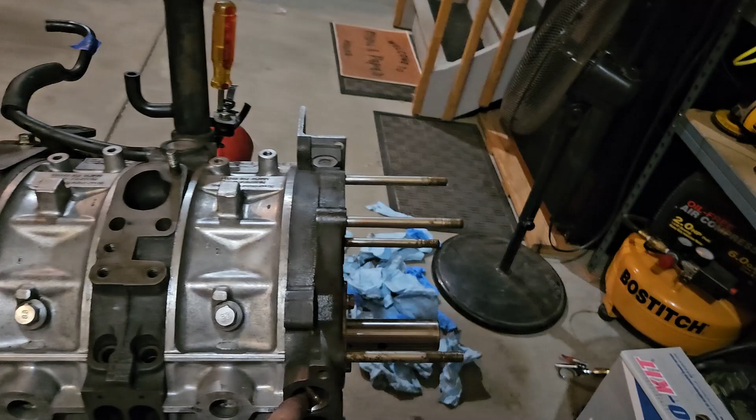Alright, I'm going to call it there for the night. Good progress. I would say technically the engine's all built. Just a few things left to do, mainly all this right here. There are some bearings and plates that go in here, then a cover, then more bearings and plates. Then there's a counterweight, a gear, another gear, all that front end stuff I mentioned in a previous video. And then the whole front cover itself, all the gaskets for that, all of the engine accessories.

I'm probably going to get most of the stuff on there before I drop it in, since it'd be easier to do while it's out. But then the clutch plate, all that fun stuff. Then the transmission on, like I was saying, when I drop it in all as one unit.